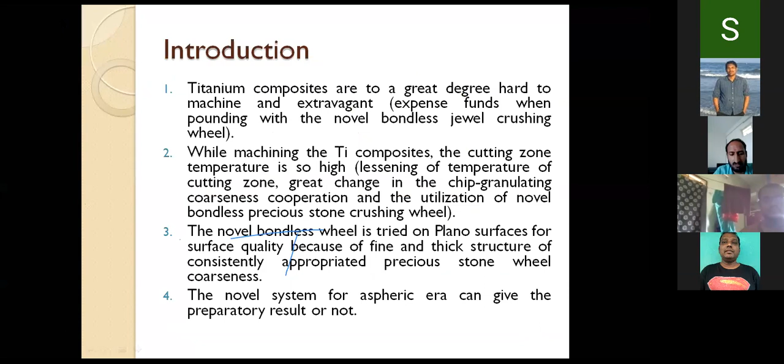While machining titanium composites, the cutting zone temperature is so high because it's a very hot material. So the lessening of temperature of the cutting zone brings great change in chip granulation, coarseness cooperation, and the utilization of novel bondless precious stone crushing.

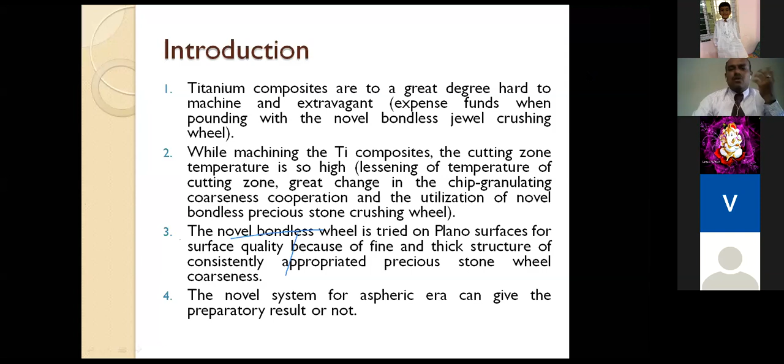In this case, you see that bonding tool, how the tool will be planned - it's a plan for surface quality because of the thick, concentric, appropriate precious stone wheel, the coarseness. The novel system for aspheric area can give preparatory results in this case. We'll see how the results come out here.

The main objective in this scenario is to study the execution of the diamond wheel in the grinding operation on Ti6Al4V. Some examination of the basic profundity of cut and molecular measurements - I will show you how you are going to do these molecular measurements and everything. The second objective in this webinar: titanium alloys are extremely difficult to machine and are economically very expensive, and are mostly used in aerospace.

Nowadays, a combustion chamber after 3 to 6 months gets its inside fine finishing gone because of the burning of fuel. So what could be done, similar to automobile reboring, is that every 6 months or 1 year the combustion chamber surface finish going to be gone.

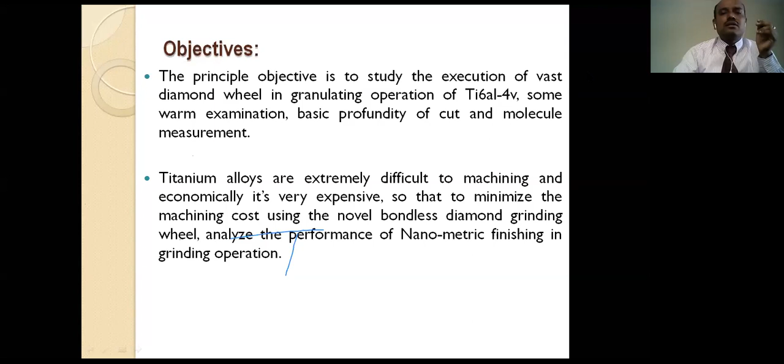So we have to use this kind of technology, this novel bondless grinding wheel, to machine that combustion chamber again and make it usable. In this case, I'm going to introduce a novel bondless diamond grind, to minimize machining cost using this wheel. The performance is nanometric finishing grinding, a very, very fine nanometric finishing of grinding. That is the scenario we are going to focus on.

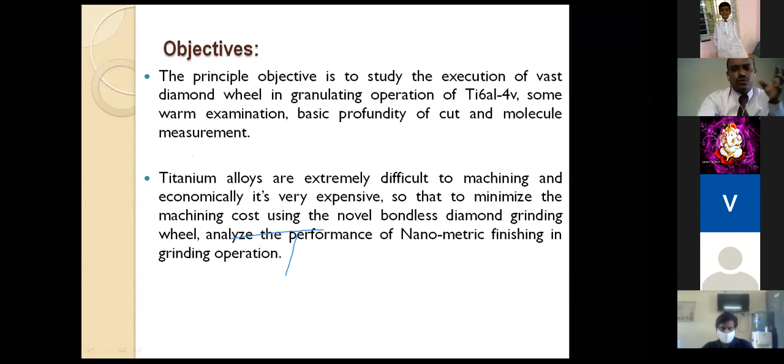Now let's look at the problem we are going to be finding. The problem statement is to explore the execution of a bondless crushing wheel in a granulator. We know how normal manufacturing grinding wheels use a type of abrasive particles. Here, what kind of abrasive particles we are using, I'm going to study the impact on cutting parameters like speed, feed, and depth of cut.

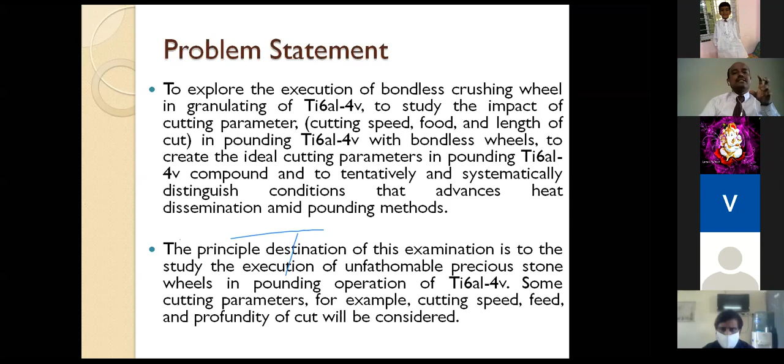First we can make a wheel like this, it's a small wheel. Where you want to do the machining depends on the area, we can make that small wheel. That small wheel, once it should be strong, we can put the stem for the purpose of holding, for the tool holder purpose.

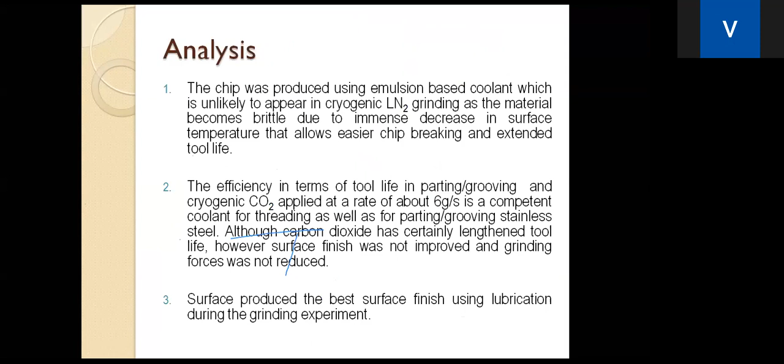The first point is that cryogenic liquid nitrogen grinding makes the material brittle due to an immense decrease in surface temperature, which allows easier chip breaking and extends tool life. Here we are concentrating on tool life. In this case, the cryogen, the liquid nitrogen, should be important.

If you are not concentrating on tool life, then you can go for dry, but dry condition parameters are for rework. You can do it, but when coming to high cutting parameters, like depth of cut being more compared to speed - high speed - then definitely you can use liquid nitrogen.

Coming to the second point for this analysis, efficiency-wise the tool life in parting and grooving are different scenarios. With cryogenic, the CO2 is applied as a competent coolant. This works well for things like threading, parting, grooving - this kind of work gets a certain tool life.

However, surface finish was not improved, and the grinding force was not reduced. Yeah, it's true, I already checked this practically.

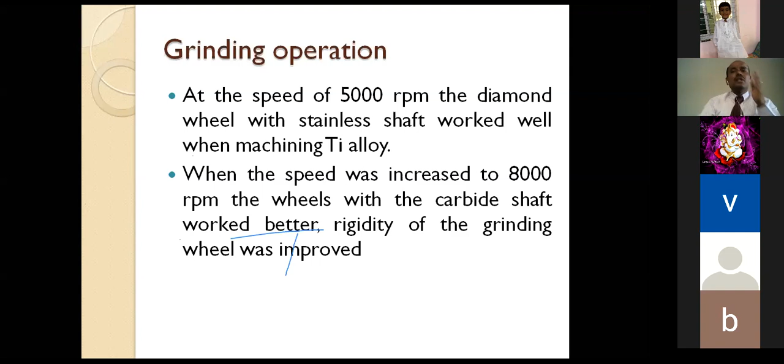That's very important here. If you know the parameters and conditions before operating the grinding wheel, you can easily get the fine finishing of grinding parameters. The conditions of this, I just explained.

The surface, if it is less than 5000, is stainless steel; if it is 8000, is carbide. Surface is produced from low speed grinding, 8000 RPM, when wheel is mounted on carbide shaft. Whereas surface experimental speed of jig grinder rotating at, 150,000 RPM, also uses a stainless steel shaft for surface parallel and perpendicular grinding.

That is, surface parallel grinding and perpendicular grinding. The piece is like this. You can do both parallel and perpendicular. I'll show you how the parallel grinding operation works, and how the perpendicular one works. I'll show you both results.

It depends. Sometimes, take the example of the combustion chamber of an aeronautical aircraft. The side walls need parallel, and bottom and top need perpendicular grinding. Why? Because the fuel will flow on this. This is perpendicular, this is parallel. So what happens is the flow of fuel will be circulating parallel. For that purpose, we do parallel and perpendicular grinding.

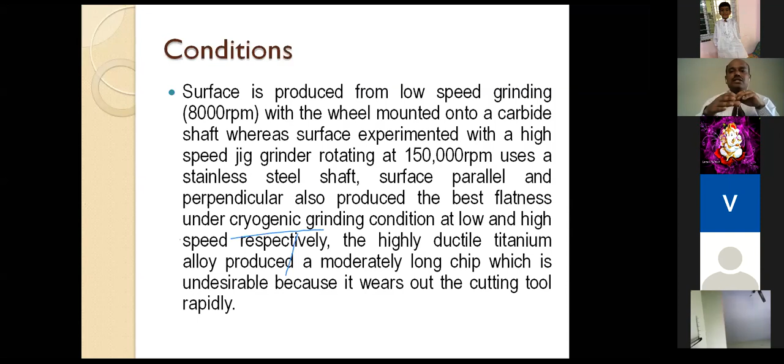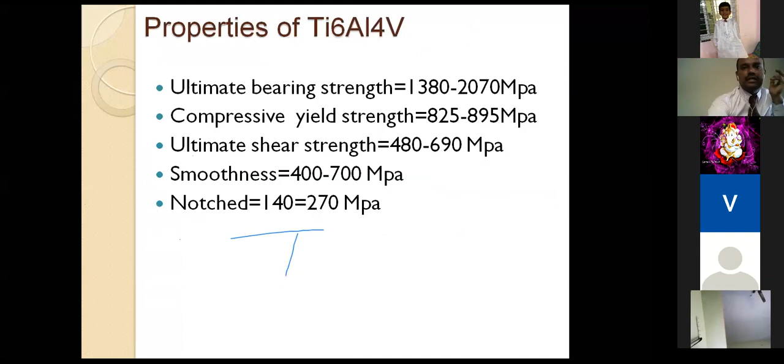Coming to the perpendicular time factor, how the force could be - I go up to 80 newtons or 60 newtons. As per the beginning slide, I showed you the parameter. You can set the parameter for bearing strength and use these kinds of parameters.

But I just apply based on this force and time to get that finishing. As the timing increases each minute, the force also increases. At 40, within 1 minute, and up to 35 minutes, you can do 60 newtons application of the grinding wheel. Automatically you get the result.

That LN2 cryogenic liquid nitrogen will display like a foam. Once done, it shows the parameter of the speed, either 8,000 RPM or 5,000 RPM. You can test it - not just 5,000 or 5,001, 5,002 or 6,000, but you can drastically increase speed by 25%.

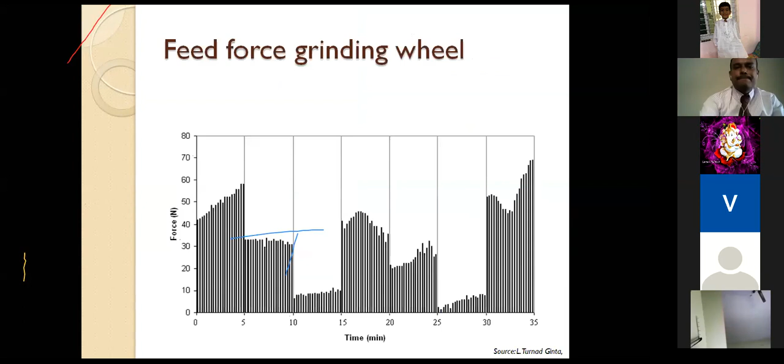So what I'm going to express in this operation, in this research, is bondless diamond machining of titanium alloys with conventional coolant. Bonded grinding is another super abrasive next only to diamond - the abrasive particles are mostly diamond, not normal abrasive particles. Because titanium material is very hard and tough to machine, it's not easy like machining mild steel. This one needs special tools to remove material, with increased force and speed.

Applications of LN2: as I mentioned, conventional cooling too. But with applications of LN2, bondless diamond grinding of titanium alloys results in excellent surface finish, a nanometric finish. You can see 0.000 something like that. If you check the depth, it's a micron, millimicron, nanomicron range - you can get that much of fine finish using this kind of grinding.

So that's my suggestion to whoever does research on titanium materials using grinding operation - this test is very good. The nanometric range at low speeds with LN2 liquid nitrogen grinding hardens titanium alloys, apparently hysteresis occurs, which is not good for fatigue application, but this needs investigation. Sometimes fatigue application is not applicable, but investigation-wise you can proceed.

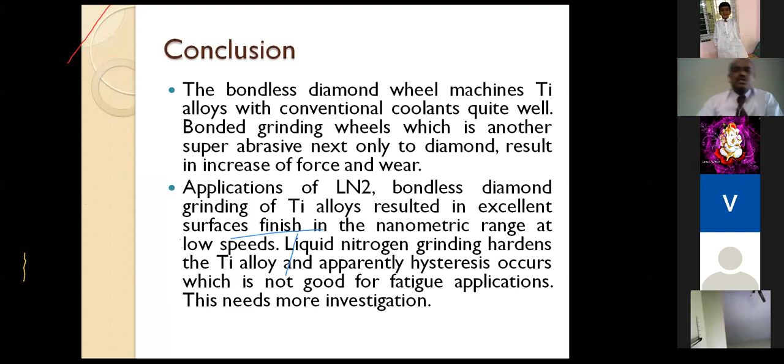You see my overall summary of how I want the surface created by the new technique. This is one kind of new technique - how you are going to use the LN2 operation, this liquid nitrogen used for machining with nanometric finishing, in less time. It's a new technique to deliver great results. The results demonstrated that utilizing universal machines can actually yield a good finish without utilizing any uncommon machines.

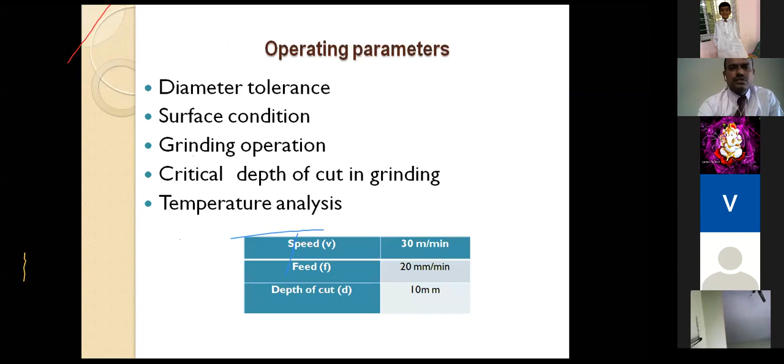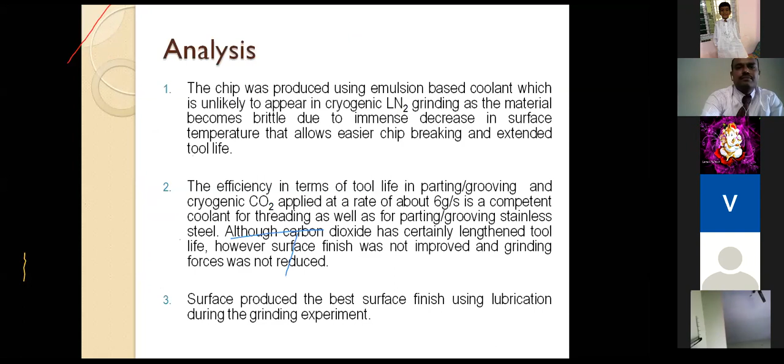Of course, before applying this, at the beginning I show you my tool. This tool, you see this tool? So while applying this tool, we have to check that the machine conditionally ensures 5,000 RPM to 8,000 RPM, then only you can use this kind of setup. Or else the bonding will cause the surface to get up and down - one side getting chomped, one side getting uneven. You can't get fine finishing, fine surface finish. So it depends on the grinding surface also.

Grinding operation, right? After you do the grinding operation, you can check at 5,000 RPM how it is. You can take the samples - 5,000 RPM one sample, 8,000 RPM one sample, and 15,000 RPM one sample. You can check the operation condition, then simultaneously check the temperature analysis of three places.

Of course, whoever does research on this still has some future research to do. This research stops up to here only. What is the next research we are going to start here? You can see the surface finish at speed of 5,000 RPM, speed of 8,000 RPM, you can check the surface finish, and at speed of 15,000 RPM you can see the result.

And you can check the temperature analysis. Of course, definitely low speed has low temperature, high speed has high temperature automatically. So you can check the temperature analysis. The second point, you can see the microstructure. After that temperature analysis, you can go and check the microstructure. The microstructure is different - I'm telling you the scenario, whether it's parallel or perpendicular. You can see the microstructure is different. You can get the objects and take the data.

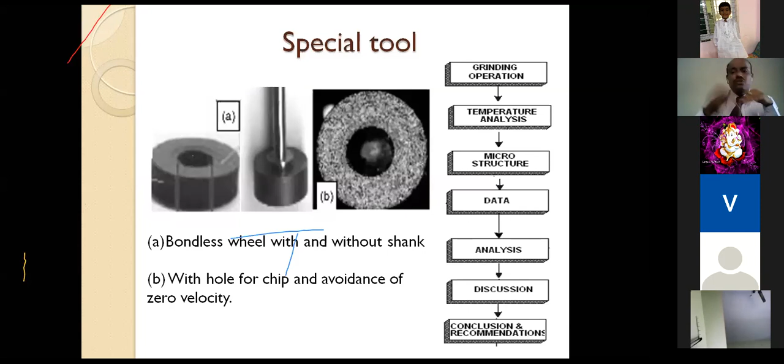Of course, the limits I'm giving are 5,000, 8,000, and 15,000 as examples. But you can get nanometric finishing maybe after 8,000 also. That's the discussion, and when you conclude, you can give the recommendation.

And if you see my last point here - which is another super abrasive next only to diamond - after diamond, it results in increasing force and wear. A study of thermal analysis, critical depth of cut, and dimensions. In this study, what you do is thermal analysis, as I just explained, along with critical depth of cut. You see which parameter you can use to get the right one - that is the critical depth of cut. At this depth of cut, you get fine nanometric finish.

That's all, so that's very important. And particle dimensions is okay. So how do you get the fine finishing? You can check the surface finish methods, so you can get it.

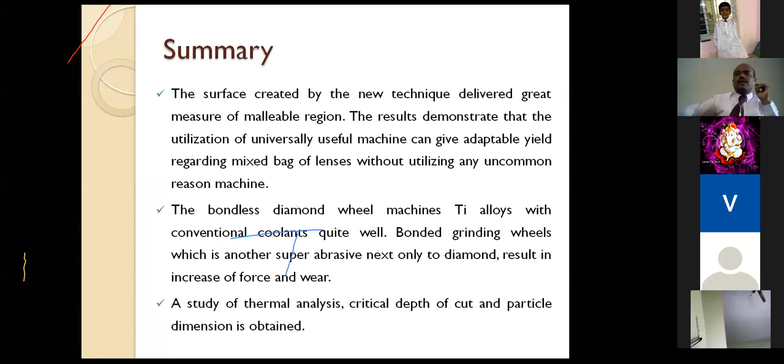I started this research in 2012, I think. I published many papers collaborated with some Indian professors also - one of them Dr. Prahalad Rao from JNTU Anantapur. I shared this research while I was in Malaysia, and proceeded with publications in Scopus journals and similar.

Next, John Roger - he is a professor at VIT, Vellore Institute of Technology. I shared with both of them and shared my views. Not only Indian professors, but also one foreign professor, though mostly Dr. K. Prahalad Rao in this area more. So I explained my support of research.

I kept publishing more - 2015, 2014, 2013. I started this research in 2012, and it's still going on. From 2012 to 2015, I focused concentrated on grinding operation; from 2015 to 2018, I focused on turning operation; and from 2018 to 2020, my research has been on milling operation.

In this milling operation, I'm finding out how to apply the grinding operation approach using a special novel grinding tool - diamond finishing - and a similar aspect in milling operation. What kind of milling operation? There's no specific one; it's some combination of tools - CBN, cubic boron nitride tool, and PCD, polycrystalline diamond tool.

Professor, is it possible to collaborate with you for future work, if anything?

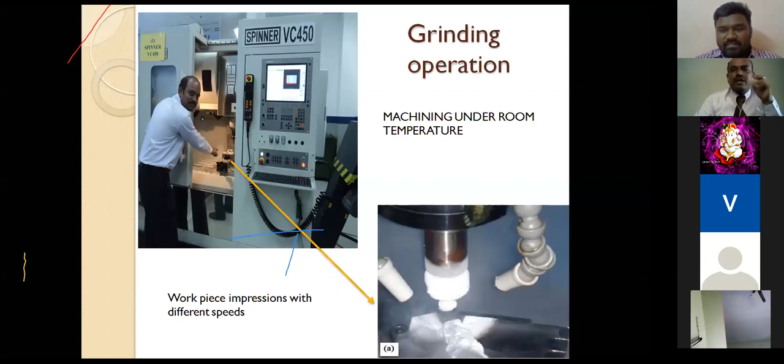Yeah sure, I will give my email ID and contact to Dr. Harinath, you just get it from Dr. Harinath, wherever I go keep in touch with me. I mentioned in my research, at that time I couldn't find anyone interested in this area, but I checked university-wide and found Dr. K. Prahalad Rao working on materials and machining. I approached from Malaysia, and he said okay, he would give input, some parameters, and share these things. He is also a professor, and also Nagamaleshwar Rao and A.R. Babu - I can join with them. If you want to join with me, I will give some work, we can do that, whatever supplier details and everything I will give where you can get it, you can do it. I can make you a team, it doesn't matter, in future, because next year I'm focusing on Dublin, Ireland. That work is almost going on, but due to COVID it's delayed, so maybe next year I will be stepping into Ireland and can start this research. So I will give my contact details to Dr. Harinath, please collect from him, and he will make the team and do along with that.